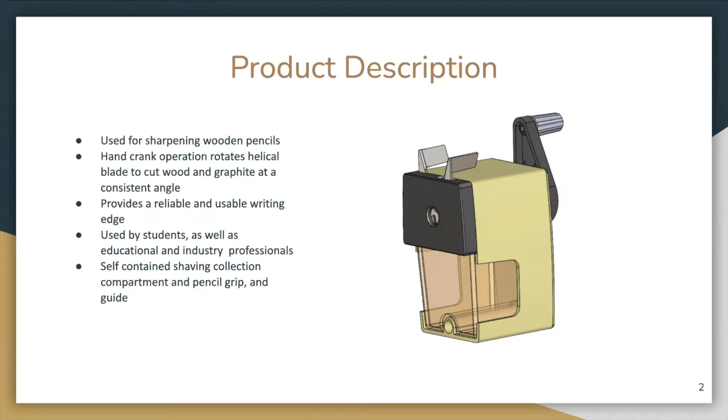Our primary customers come from the education sector, like schools, colleges, and universities, which all have a need for sharpening pencils to ensure that students have a reliable and usable writing instrument. Our secondary customers are industry professionals: professionals in creative fields, architects, designers, artists, and engineers alike all rely on pencil sharpeners to ensure that their pencils can quickly be restored to a usable condition so that they can continue their work.

Regarding the market share, we are targeting the domestic market in the United States, where the annual demand for pencil sharpeners is approximately 3 million units. Our goal is to capture a significant portion of this market share, aiming for an annual production volume of 100,000 units.

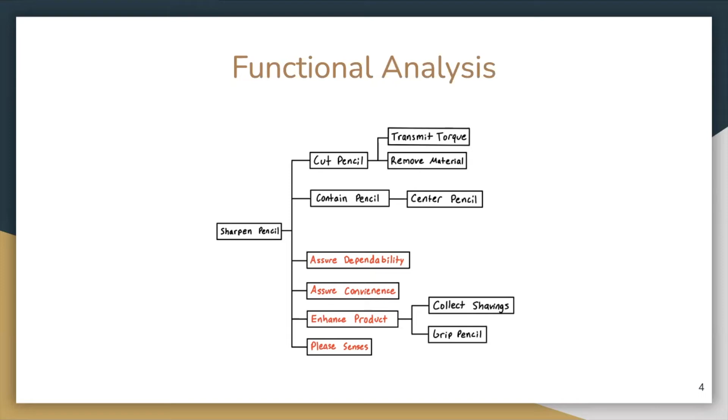Next, we have the functional analysis, with our task function being sharpen pencil. Branching off from that, we have two primal basic functions, cut pencil and contain pencil. Branching off from cut pencil, we have the basic functions transmit torque and remove material. And branching off of contain pencil, we have the basic function center pencil. Branching off of enhance product on the bottom of the chart, we have two supporting functions, collect shavings and grip pencil, and all of these functions come together to create our product.

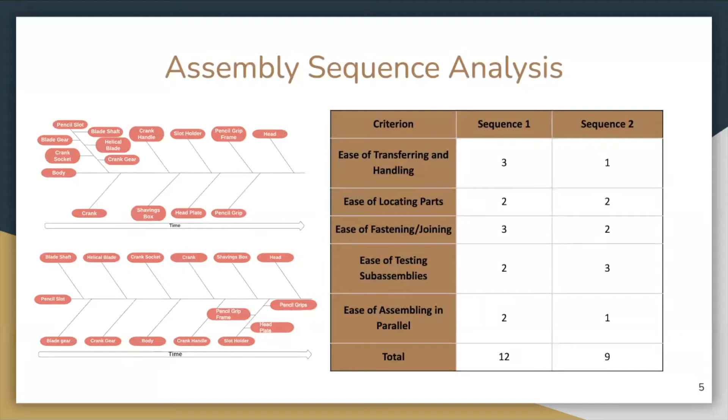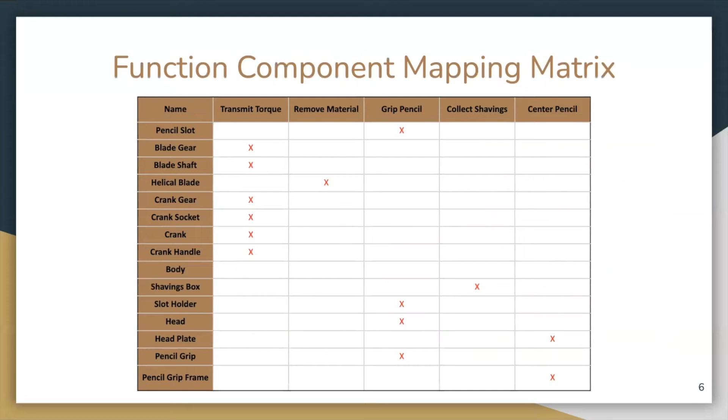Next, we have the function component mapping matrix with the 5 functions at the top being transmit torque, remove material, grip pencil, collect shavings, and center pencil. And one thing to note is that the body does not have a function mapped to it, which means it can be better redesigned in the future.

This is our bill of materials. Our calculated cost is based on an annual production of 100,000 individual pencil sharpeners. Manufacturing costs for injection molding, machining, and sheet metal processes were calculated using the methods covered in class. The manufacturing cost for the die-cast components were estimated using the website custompartnet.com.

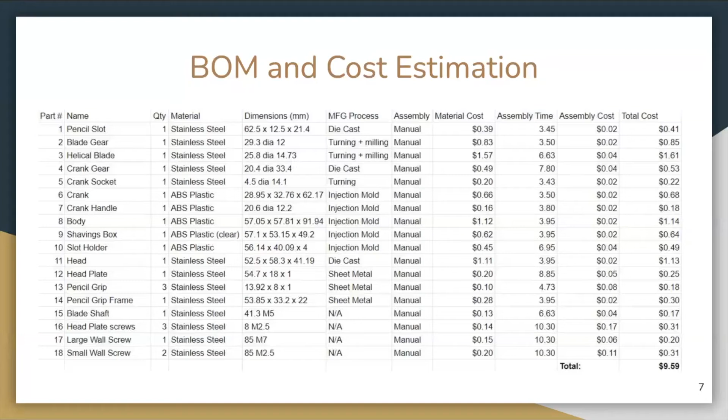We assumed that the pencil sharpener was manually assembled, and we estimated that the factory workers would be paid an average of $20 per hour. The total estimated cost to manufacture one pencil sharpener is $9.59.

This is a comparison of component cost and functionality. The component is considered high cost if its total cost is 50 cents or greater, and low cost if it's below 50 cents. Component functionality was determined using the functional component mapping matrix on slide 6. The mapping matrix identified the crank handle, pencil grips, and pencil grip frame as low functionality.

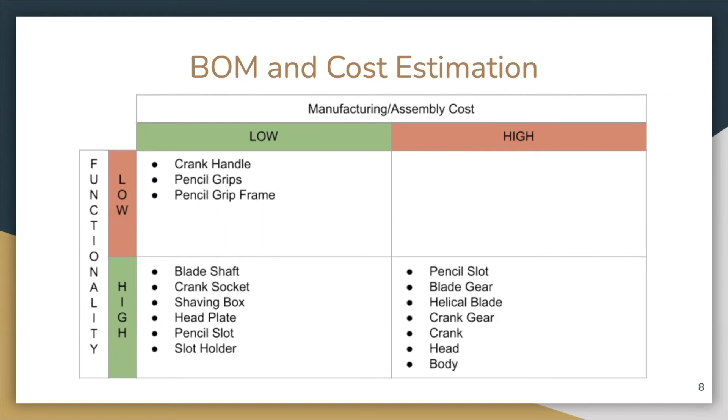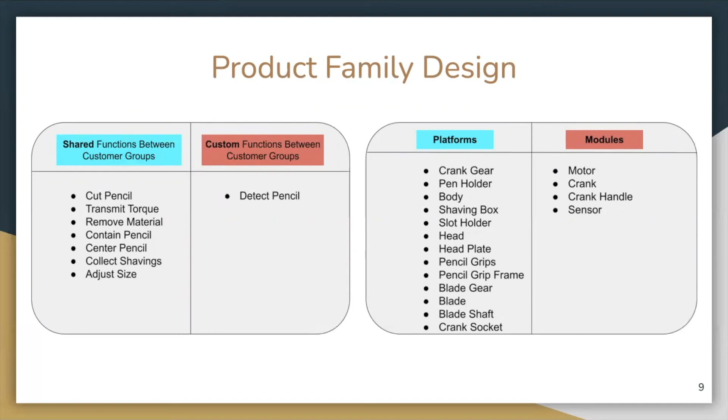Our final analysis was about the product family, where we compared our crank pencil sharpener against a motorized one. The shared functions between these two were almost the same, with the only custom function between customer groups being detecting pencil for the motorized. Because of this, the platforms were almost exactly the same, where the only modules were a motor and a sensor for our variant, and the crank and a handle for the original.

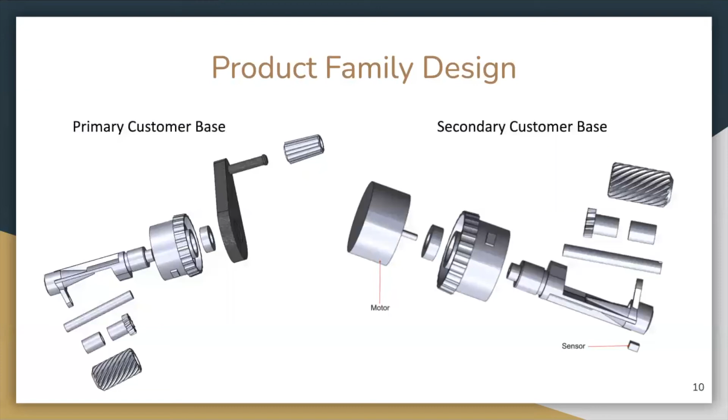On the next slide, we can see a nice exploded view of how these modules will be interacting with the components that will actually be sharpening the pencil. And on the slide after that, we can see a nice exploded view of all the parts that would be shared between both the motorized and the crank variants of this pencil sharpener.

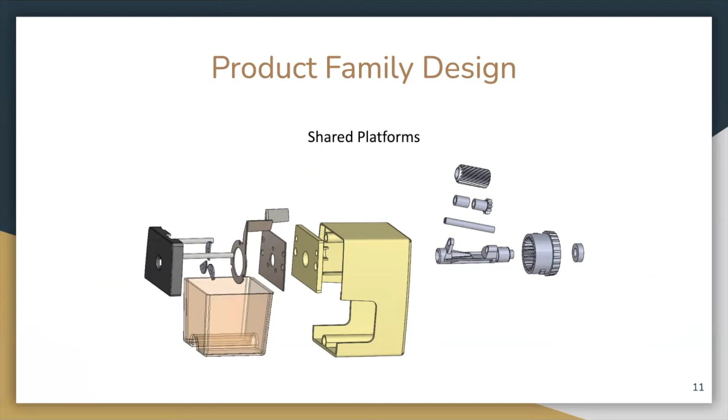Because we have so many platforms in this, we were able to optimize this by finishing all of the body's assembly before working on and finishing the sharpening components, and that led us to only 4 steps before the differentiation actually happens. This has been the end of our presentation, and thank you for your time.